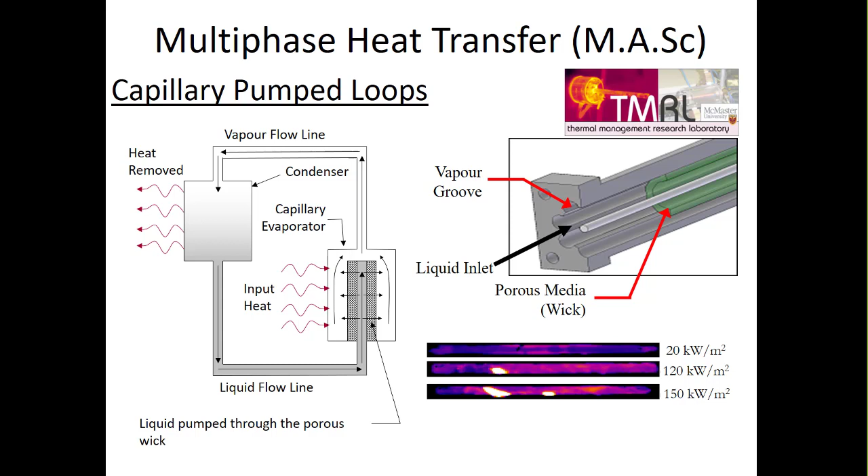So we were looking at different ways to do that using capillary forces. One of the ways you do this here on Earth is that you have your heat source below, and it would boil some water, and that vapor would move up. But the reason the vapor moves up, or really that gravity pulls the liquid down, is because of gravity, which doesn't work in space. So we were trying to think, how could we run a similar kind of heat transfer loop that's multi-phase, that's boiling fluid in space?

So this was a pretty cool project. Then in my PhD, and what I mostly do now, is this idea of digital microfluidics. Here we take small droplets, maybe 100 nanoliters of fluid. These are on chips that are maybe 1 millimeter by 1 millimeter. That fluid is sandwiched between two plates, kind of like the white part of an Oreo cookie. And those plates are separated by about the thickness of your hair, so about 100 micrometers, 1/10 of 1 millimeter.

We're trying to do that to automate biological protocols to make things more accessible. We all do these coronavirus tests where they stick something up our nose, and then they clip that, send it off to some medical diagnostic lab, and in a couple of days you get a result back. But with devices like these, the idea is maybe we could do these kinds of tests on site so we wouldn't have to use traditional medical diagnostics.

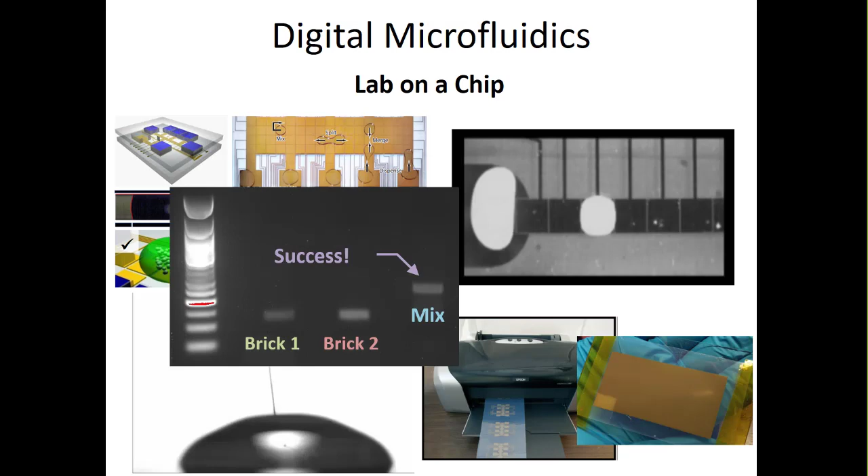We work in different applications, looking at droplets drying and the patterns they make, to try to make flexible electronics or maybe do blood diagnostics. And then we're trying to get into this personalized healthcare where we take a lab, shrink it down, and automate it onto a microchip. So that's kind of the research that I do.

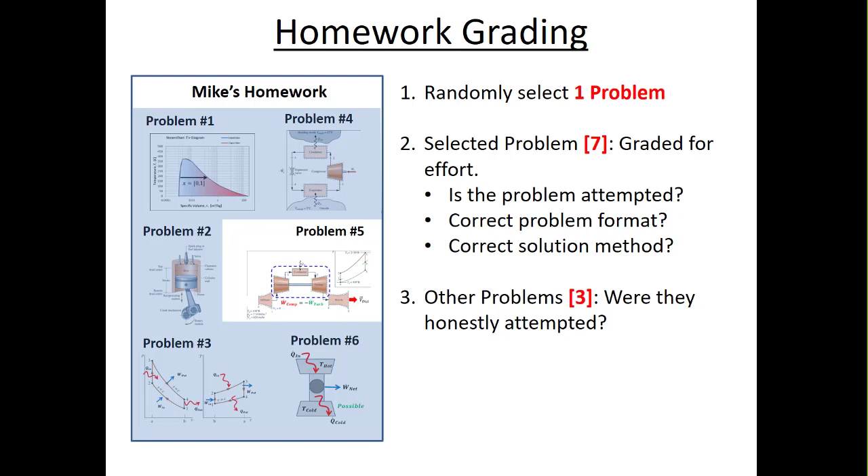We'll grade homework this way: you'll upload your homework to the Dropbox, which should already be live on my courses. I'll look at all the problems, randomly pick one, the same one for everyone in the class, and grade that one more rigorously. But I'm more concerned that you're following the homework process we lay out, and less concerned with you having the correct answer. We'll grade that out of 7: did you attempt the problem, did you follow the right format, did you make reasonable assumptions, did you follow the right method - I'm less interested in the numerical answer. For all the other problems due, I'll just check that you did them, and that's worth 3 out of 10 for a given problem set.

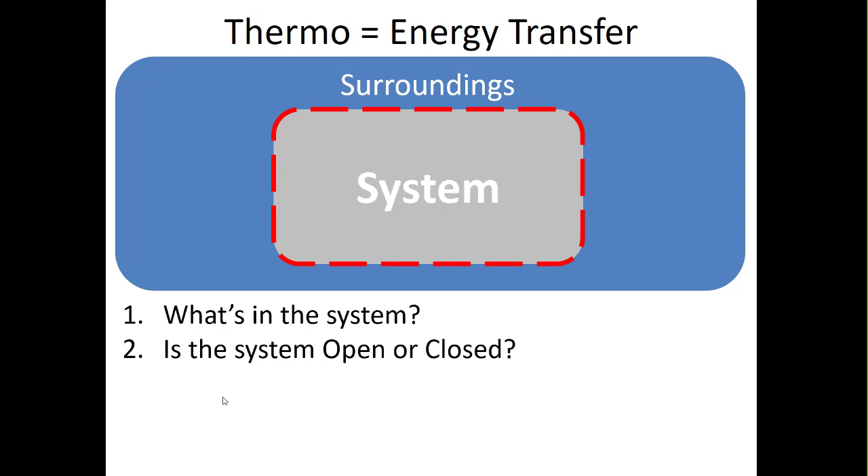Like if you think about your car - I drove here to RIT today - my car engine has an air intake and an air exhaust, so air comes in and out of the system. But a closed system, for part of the cycle of the internal combustion engine, there are two valves, intake and exhaust, that let air in and out of the piston. When they're both closed, there's nothing coming in or getting out of this piston cylinder assembly, so then it's a closed system. A closed system means mass can't be transferred between the surroundings and the system.

What we do is, if we're looking at a problem and how things change over time, we look at some initial time and say, how much energy is in our system? Then we try to figure out how much energy is in our system after some amount of time has passed, so what's the energy change in the system? In this class, the types of energy transfer we're interested in are heat transfer and work.

The reason for this is, as mechanical engineers, oftentimes, like my automobile, the way we get something to move is by burning something. We're turning this heat energy from combusting fuel, in the case of my internal combustion engine, into mechanical energy, that piston moving up and down, connected to different assemblies, and then the wheels start to turn. So in thermodynamics, we're interested in how do we take heat and turn it into work, or more generally, how does the energy inside our system change because heat is coming in and work is leaving?

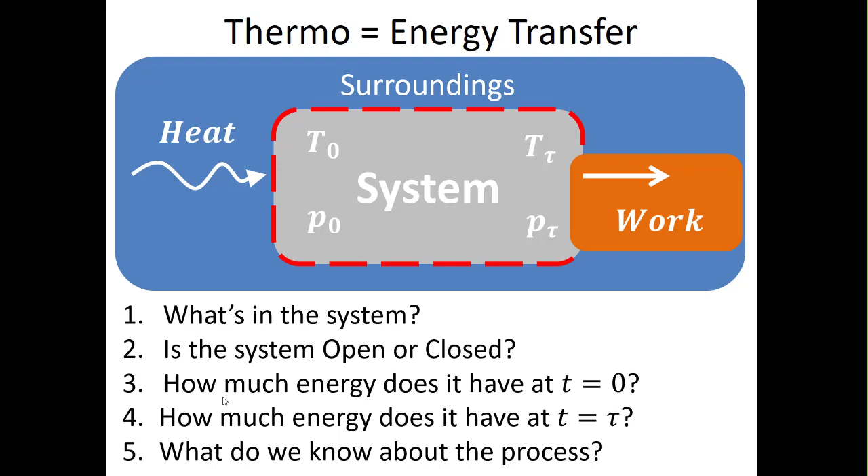So in this class, we're going to talk a little bit more about work, or work and power. Power just means work over time, right? The time derivative of work.

I'm not a huge fan of these big verbal definitions of things. The first law of thermodynamics is that energy is conserved. We can read all of this, but I won't read it to you because you can read it faster than I can read it to you.

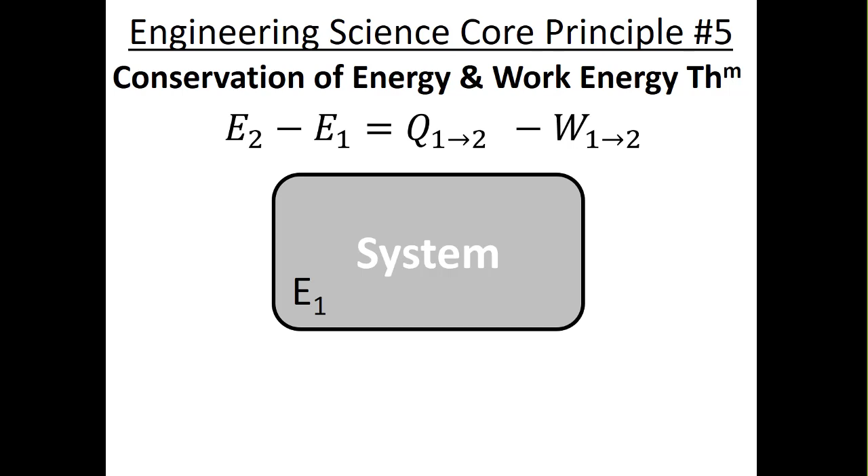So again, this is kind of the schematic. I like to draw these. It's kind of basic, but in my system, I have some energy at time 1, and then I can add heat to it.

Now, this is important because signs are going to be really important in this class, and units are going to be super important too. This is one of the reasons why people hate this class, because there are so many units, particularly if you're not a fan of the metric system yet. You will certainly be a fan of the metric system over the imperial system by the end of this class, because unit conversions are much easier to do when you're dividing by 1,000 versus whatever conversion number you want for the imperial system.

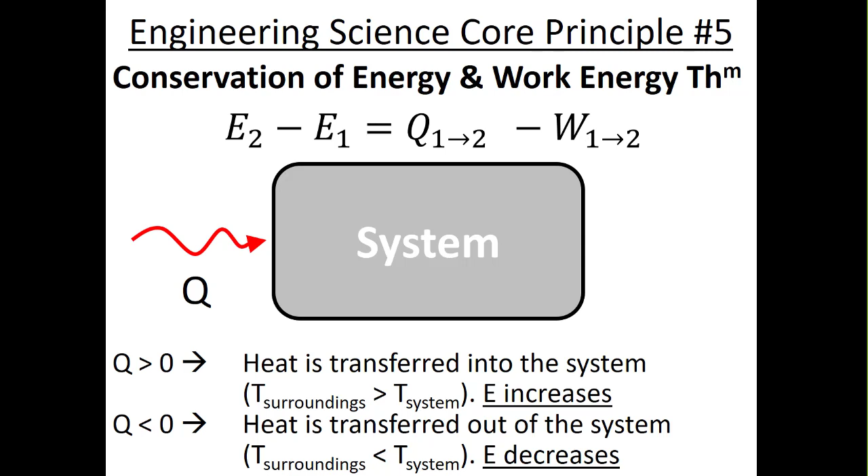So the thing for heat: when heat is positive, heat is going into the system. Heat in is positive. And when heat is negative, that means we're losing heat from the system. This is why, if you buy a coffee or tea at Starbucks, you put that sleeve around it, because that means you're losing less heat. So heat in is positive, heat out is negative.

But work is the opposite, right? If work is done by the system on the surroundings, that's positive. So work out is positive, and work in is negative. In an internal combustion engine, when one piston is being pushed down, another is being pushed up, compressing the gas. That's work being done to the system, so work in is negative.

When we know all that, if we put it into the equation, we'll be able to find how much energy is stored in the system at time 2. If E2 is bigger than E1, that means we had more energy in the system at the end of the process than at the beginning. Conversely, if there's less energy in the system at time 2, that would be a negative number, meaning we've lost energy and depleted the system.

You can remember this by the words, which is my least favorite way, or by the equation, which is always useful, or by the little schematic I've drawn here. This tells us that heat in is positive and work out is also positive. We remember this with the mnemonic HIP to win: heat in is positive, that's HIP; work in is negative, that's win. So HIP to win tells us heat in is positive and work in is negative. It seems a little weird because they're both energies - why is one positive and one negative?

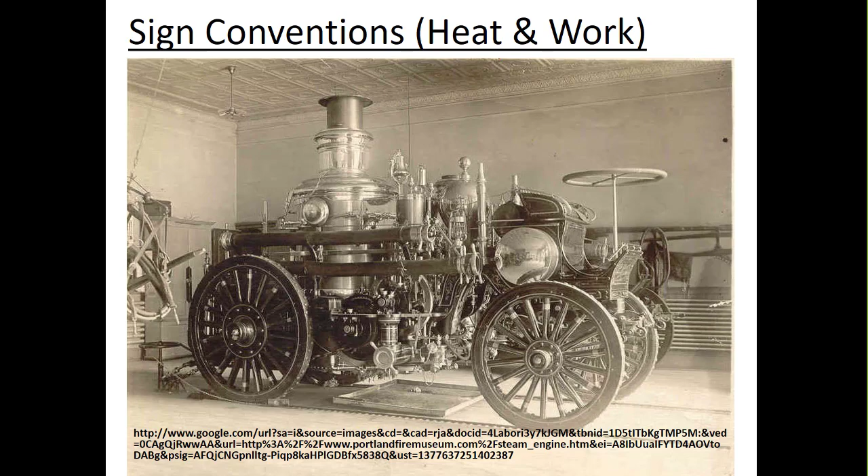It goes back to looking at steam locomotives. What you do in a steam locomotive is add heat energy - you burn coal, that coal boils water. As water boils, those molecules get forced further apart, and that steam wants to expand. It expands over some kind of fan blade, which turns something, and you've gone from heat energy into mechanical energy. So these steam engines were putting heat in and getting work out - both of those things are positive in this equation.

I also just like the picture of that old locomotive.

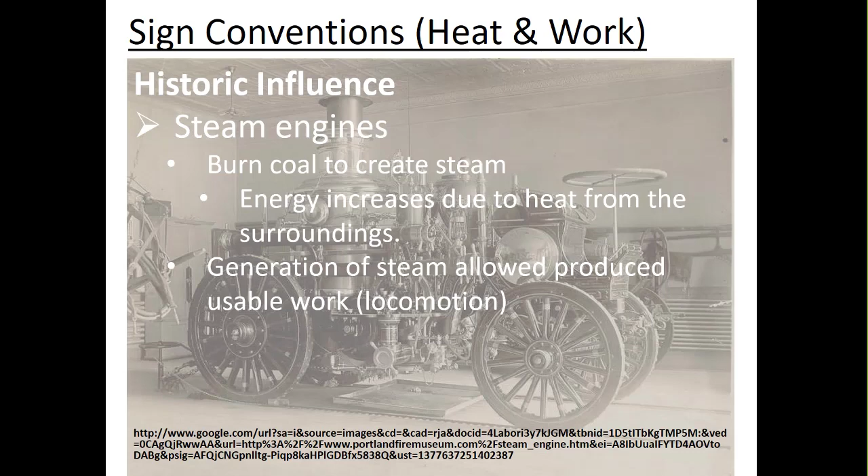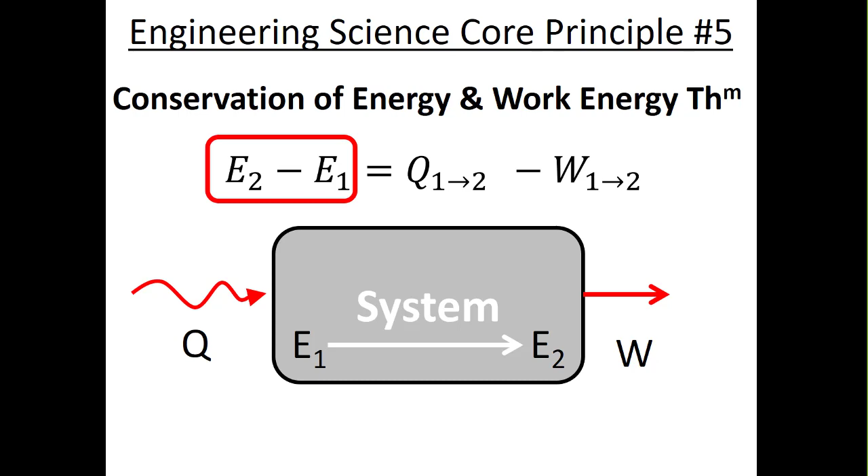When we look at the energy in the system, what kind of energies are we talking about? This equation you're already familiar with, though you probably never dealt with the heat term in a class like first year physics or high school physics - you were just thinking about energy and work. So there are different kinds of energy: gravitational potential energy, like when I push my kids on the swing, pulling them back so they're at some elevation, then letting them go - gravity does the work, transferring energy from gravitational potential into kinetic energy.

We can also think about spring energy, like a bow and arrow. The limbs of the bow are like springs. The archer pulls back the string - the string isn't elastic, it's rigid - and the limbs bend, storing potential energy in the limbs. When you let it go, that energy goes to kinetic energy in the arrow.

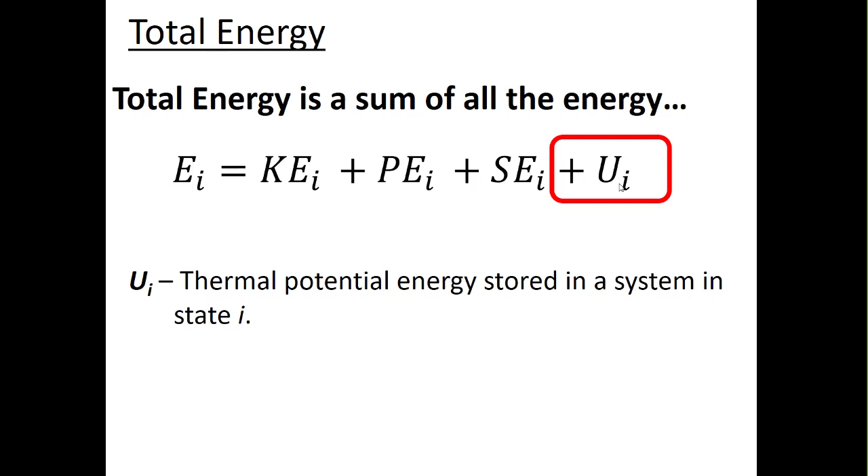So this is total energy, made up of kinetic energy plus potential energy, plus spring energy. But in the problems we're interested in this class, things like how does an internal combustion engine work, or a nuclear power plant, or a natural gas power plant, usually the kind of energy we're going to be interested in is this internal energy, which is related to the temperature and pressure of whatever material or mass we're talking about.

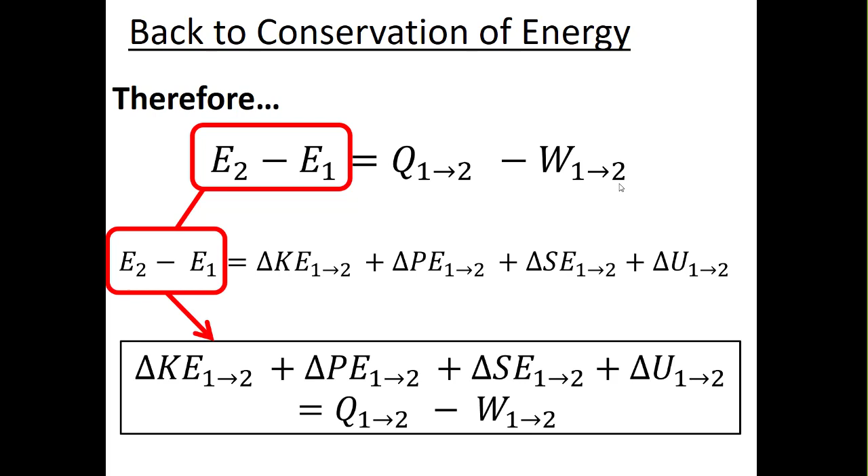So you do kind of already know this. We can write the left-hand side of this equation out. Instead of just delta E, we can say it's delta kinetic energy plus delta potential energy plus delta spring energy plus this delta internal energy. So now our first law looks like this: the change in kinetic energy plus the change in potential energy plus the change in spring energy plus the change in internal energy is equal to the heat that comes in minus the work that goes out. This is the same equation as before, but we're expanding the terms.

Because in these thermal fluid problems, when we look at heat transfer, thermodynamics, fluid mechanics, we have good equations but usually don't know all the inputs. So we break the terms apart like this because in a lot of problems, kinetic energy, potential energy, and spring energy aren't going to be that important. So we'll assume that delta E is often just delta U, and we'll talk about how to fix that later.

You know this already from maybe your mechanics class or high school physics, but they didn't tell you all the assumptions you're making. Anytime you write down an equation, there are assumptions implied by it. In engineering mechanics, you probably said that internal energy doesn't matter, that the change in internal energy on a swing set is about zero, since your temperature didn't change much and there wasn't much heat entering or leaving your body. So what you got was the change in kinetic energy, plus the change in potential energy, plus the change in spring energy equals the mechanical work.

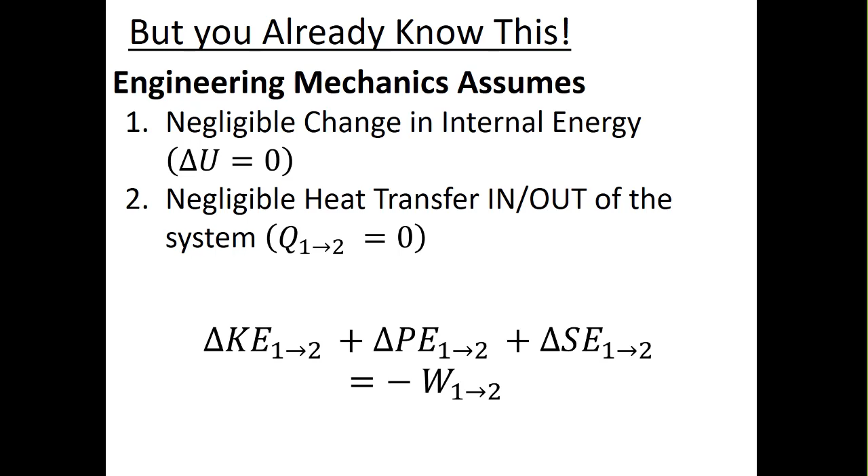That's something you may have seen before, but they didn't necessarily tell you that you were making these assumptions. Just like when you go out on co-op, it's going to be really important that you leave good documentation behind, because these co-op positions are transient. You're only there for a short amount of time, so you want to leave good notes so whoever comes after you can pick up where you left off. Your first introduction to this will probably be when you come in as a co-op and get the last co-op's notes and realize half the stuff you want to know isn't there. This is kind of like commenting in programming, which is something maybe I should be better at. But you want to have good notation, and that's what tracking your assumptions does.

In thermodynamics, unlike solid mechanics, we're really interested in internal energy and heat transfer. It's thermodynamics, so we're interested in temperatures and heat transfer, because that's one of the two main kinds of energy transfer we're looking at. So we can't just cross out Q and we can't just cross out delta U. We're going to, for now, leave this whole equation. This only works for closed systems. As we get into open systems, when mass can move freely in and out, we'll have some more terms to deal with.

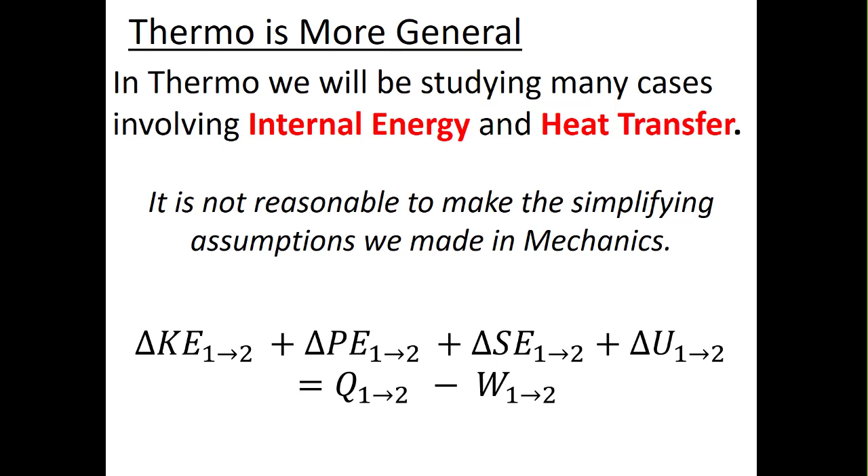We won't beforehand make any simplifying assumptions. When you get into a particular problem, maybe you'll say there's no kinetic energy change, or there's no potential energy change, so you might cross out some terms for each individual problem. But at the base level, we're going to leave the equation like this.

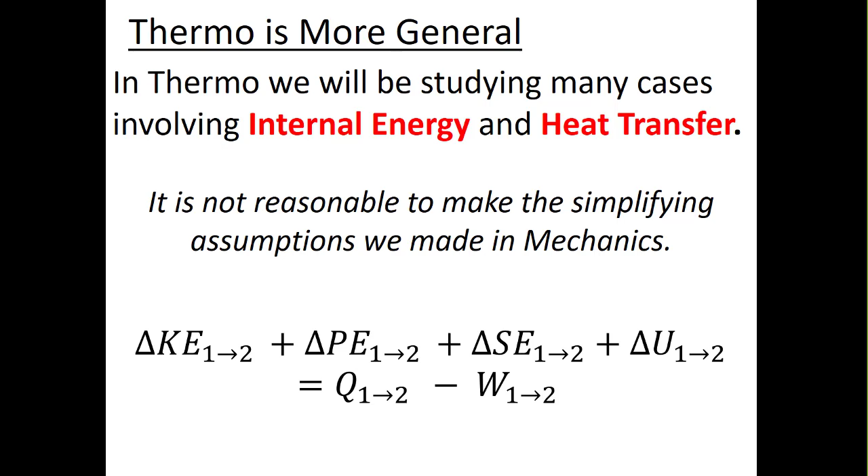So that's kind of where we get into work. But then we talked a little bit about power being important too. Power is work divided by time. So when you look up a particular automobile engine, you might be interested in what's the horsepower of that engine. Horsepower is one of those imperial units that doesn't make a lot of sense, but it's talking about how much work it puts out per unit time.

Typically in this class, when we see a dot above a letter, this is shorthand for taking the derivative with respect to time. So dw by dt is the same thing as w dot, the rate of change with respect to time. That's not an uncommon bit of notation in mechanical engineering.

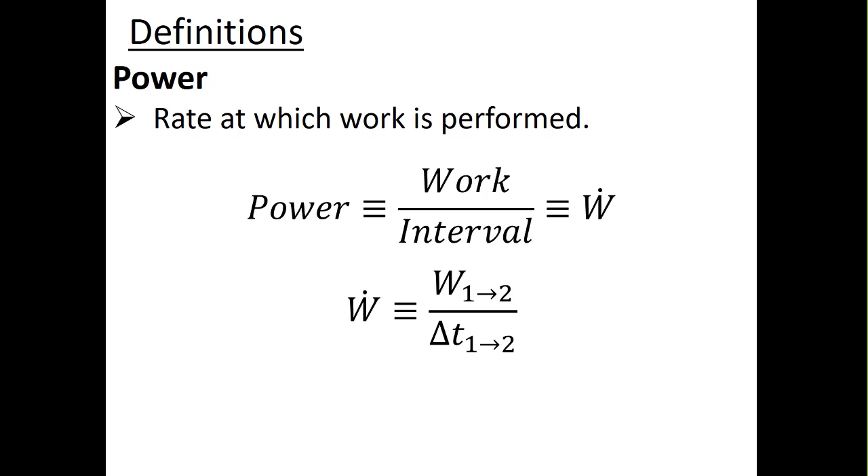We know that power is work divided by time. If the work was constant to get this rate, we could just take work and divide it by delta t. So if the rate of work was constant, we could do this. But the rate of work isn't always constant. Still, as a first approximation, we could do this.

So we can look at the units now. If a process produces 1 joule of work in 2 seconds, what's the average power output? I've got to track my units in my calculation here. W dot equals 1 joule divided by 2 seconds, which is half a joule per second. But a joule per second is the same thing as a watt, so watts are joules per second.

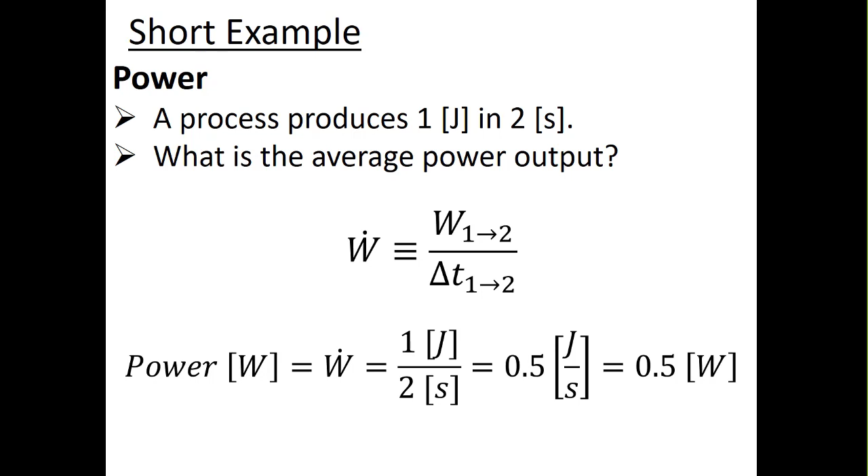Now we want to talk about what happens here. Certainly not advocating that you do this, but maybe you got a potato gun. It's a PVC pipe with a potato as a plunger. You have air in there that's at some high pressure.

In this case, what's happening is we pull this pin, maybe like a firing pin, and then this air, under pressure, wants to push out. Because force is pressure times area, and if the rest of this is rigid, it's going to be pushing force on this piston face, or potato in the potato gun case, and that's going to cause this piston to move this way.

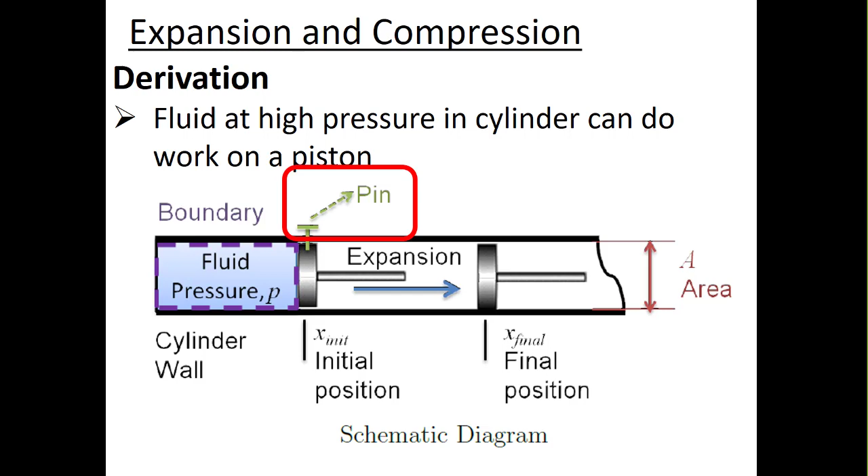That air is going to be doing work on that piston face, right? And it's going to move. So when we pull this pin, the piston's going to move. The air pressure is going to push the piston out.

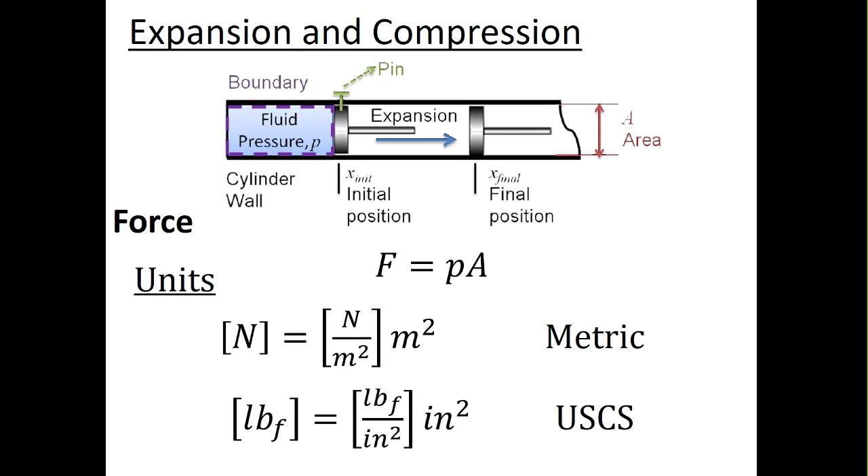So now if I want to find the work or the power, if this pressure is constant, I can find the force on the piston by taking the pressure times the area. If I was using metric units, pressure would be in pascals, which is newtons per meter squared, force per unit area, multiplied by an area, and I would get newtons.

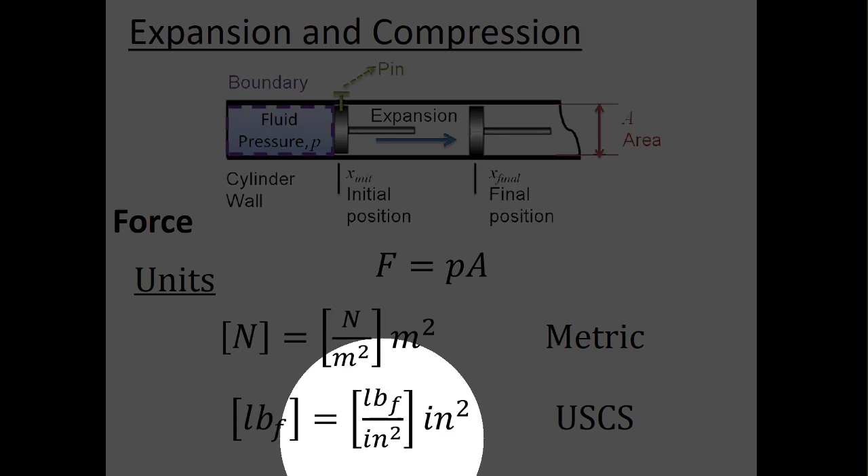If I was using the imperial system, sometimes called the US customary system, I would be taking pressure maybe in a unit like pounds per square inch, or PSI, that's pounds force per square inch, multiplied by inches squared, and I get pounds force. So that's good, I'm getting force.

Because in this case this pressure is going to be changing as the piston is moving, I need the force as a function of x. So to find the work, I would have to integrate the force over the length. But just for unit's sake...

Let's say you don't trust me with this equation. Let's at least check the units. This is kind of like one of the things we'll learn in this class: checking the units is a bit like cheating, because you can always check the units. It's never going to tell you if you're right, but it could tell you if you're wrong.

So if work, which is a kind of energy, gave me Newton meters squared, I'd know that's wrong, because joules, which is energy, is newtons times meters. Or maybe in imperial it's some force times distance, so maybe it's inch pounds. My force is going to be in newtons or pounds force, my distance term could be in meters or inches, and I'm going to get a force times the distance. So that looks good so far for work.

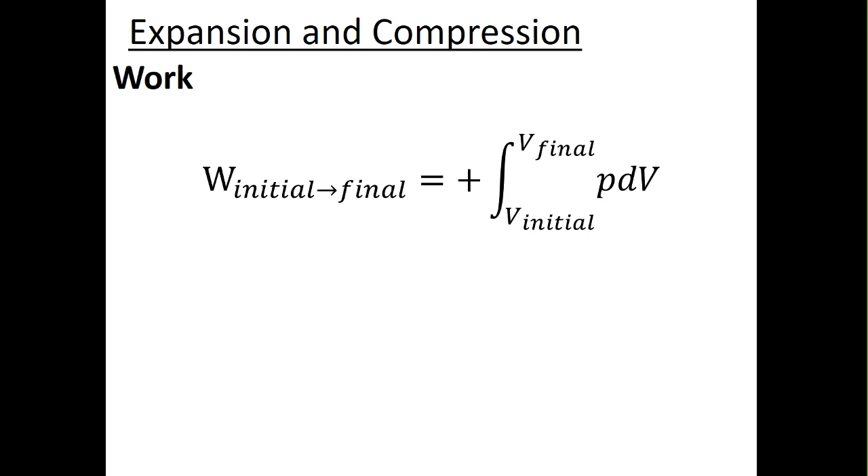If you want to look at the full lecture posted online, I go through a derivation of this equation, but I wanted to hit the time here, so I got rid of the derivation. But another way to write this down, this force times dx, is to take the integral of pressure times dV, where V is volume. So we're integrating the pressure over the change in volume.

Now, again, I haven't shown you the derivation, although you can see it in the online video if you want. You might not believe me, so let's at least check the units, because if the units are wrong, then you know for sure that I'm wrong. Here we want joules again.

So if my pressure was in newtons per meter squared and my volume was in meters cubed, then what I would get is Newton meters, which again is joules. So this equation is correct, and we'll be using it a lot, but one of the ways you can check that it's correct is by looking through the units.

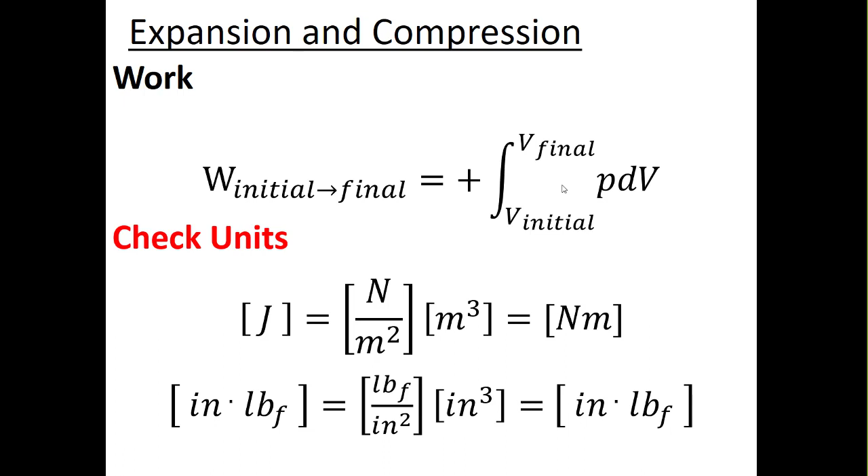If we were talking about imperial units, our pressure is going to be something like PSI. Volume could be in inches cubed, to save myself the headache of cubic feet. Then the inches squared cancels out two of these, and I'm left with inch pounds, which is a unit of energy because it's force times distance, or distance times force, same thing.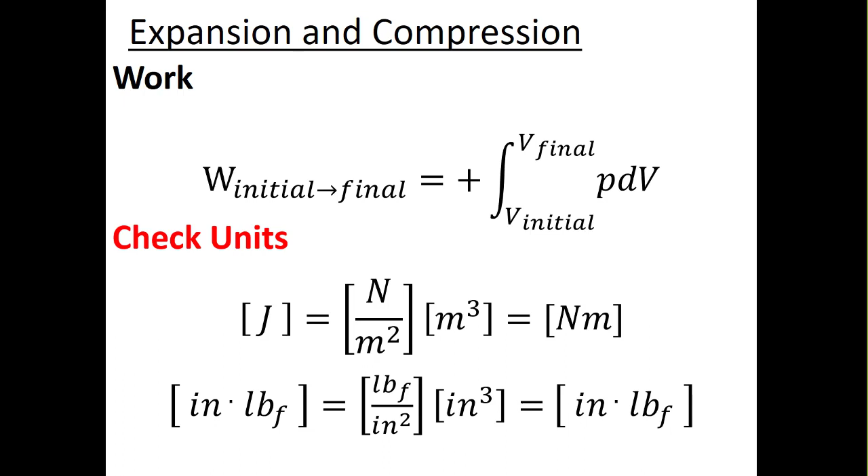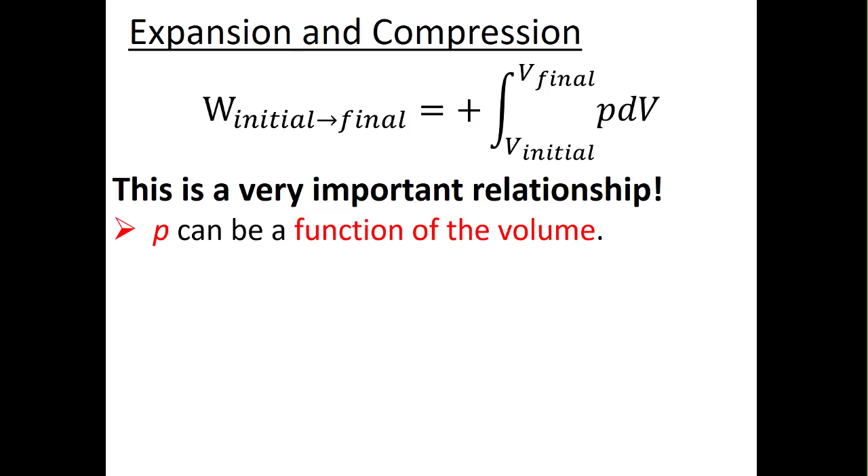So this is a very important relationship, and we'll be using it a lot in this class, because as we talk about piston cylinder assemblies and how much work is being done, we'll want to know what the pressure-volume relationship is. So we'll often be talking about what we call polytropic processes. A polytropic process is one where we know the relationship between pressure times volume to some exponent is equal to a constant. In next class, we'll learn how to deal with that to solve for work.

Pressure can be a function of volume, and if we know that, we can analyze arbitrary cross-sectional areas. If we know what pressure is as a function of volume, I can write down pressure as a function of volume and plug it into this equation to get a value for work, which is good, because our big equation for the first law is delta E equals Q minus W.

So this class is really about how do we find W. The most important way we're going to find W for the first third of this class is by taking the integral of P dV. So if we have these polytropic processes where P times V to the N is a constant, then P will be C divided by V to the power of N. I could plug that back in and do a little calculus to find the amount of work in the system.

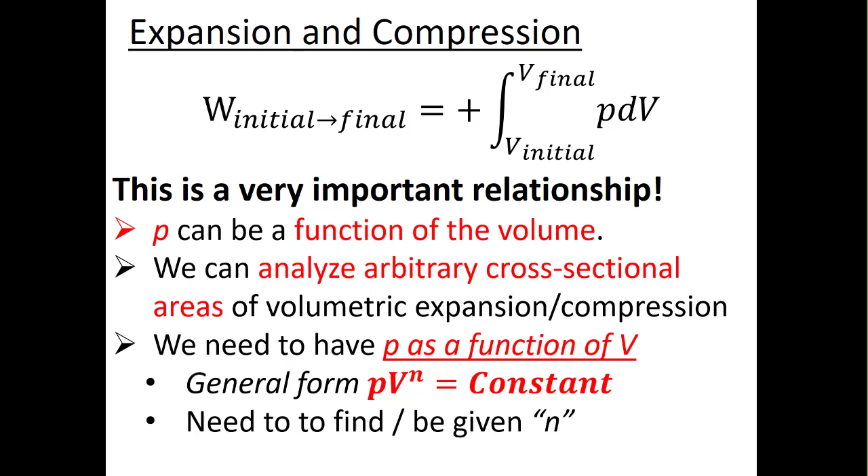So oftentimes in a problem, it'll tell us PV to the N is constant, but they'll tell us N will be something like 1, or 1.3, or 2. So we'll get that relationship as given information in a problem.

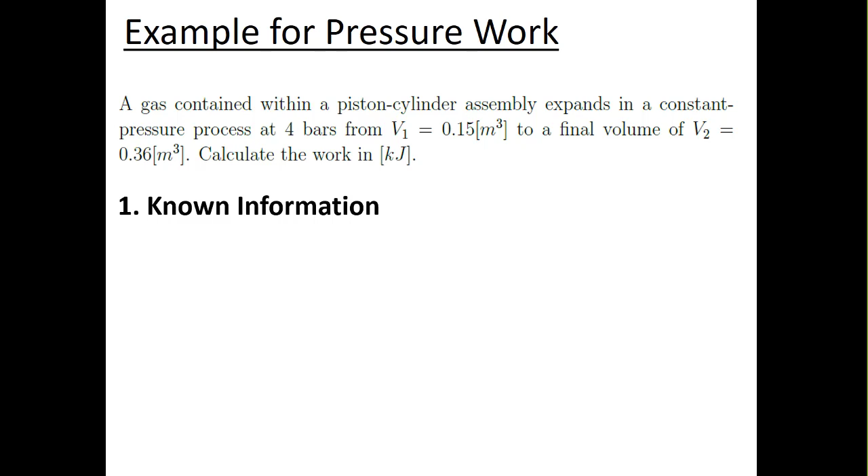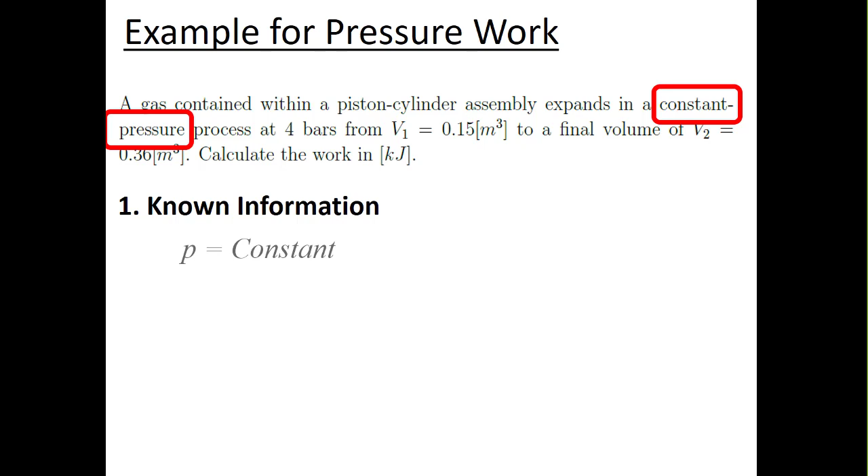So if we go through our stock process for how to do problems, we take our known information. We look through the problem: the first thing here is that it's a constant pressure process, so the pressure stays the same all the time, which is good. Anytime something says constant, there's a little voice in my head cheering, because it means I don't have to do a lot of calculus—the calculus will be pretty straightforward since the pressure is constant. So I know the pressure is constant, and even more, I know the value: the pressure is 4 bars.

My advice to you, every time you're writing down known information, is to write the pressure down in kilopascals if it's a metric problem, because the units will work out well: if you integrate P dV with pressure in kilopascals and volume in meters cubed, you'll get kilojoules. So this is in bar, but we'll have to convert that later. We know we go from a volume of 0.15 meters cubed to a final volume of 0.36 meters cubed, and they ask us to find the work—work equals force times distance, or pressure times change in volume. They want that in kilojoules, so not only do they want the work, they tell us what units they want it in.

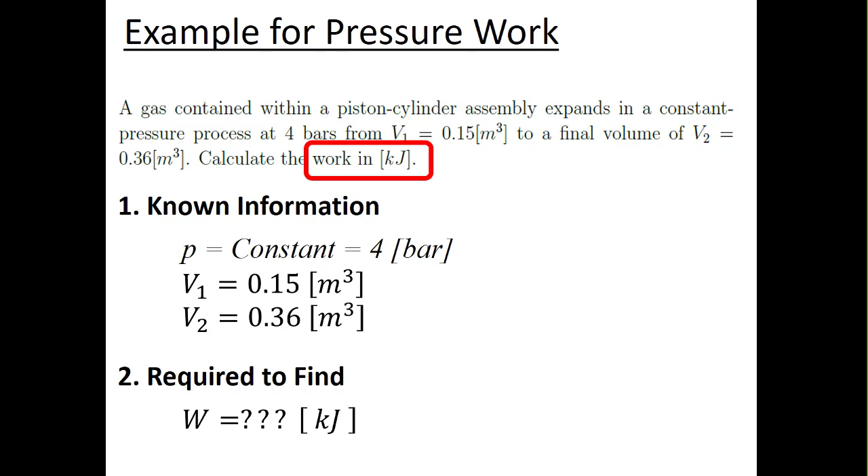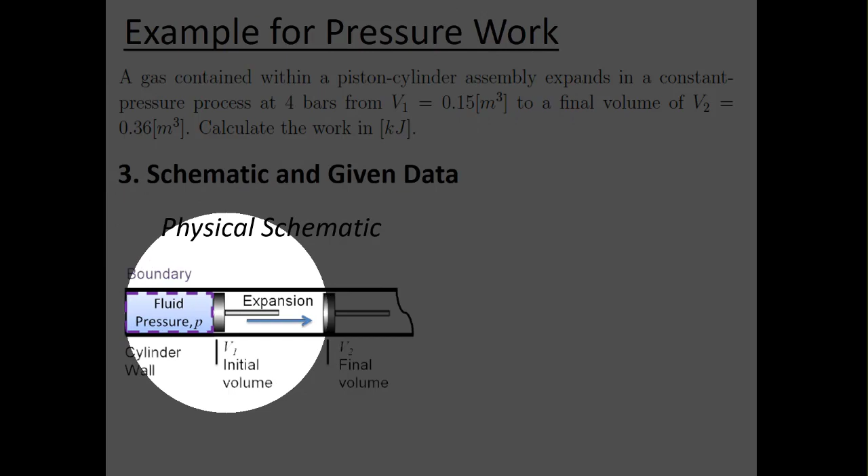One of the things we always want to do is draw a schematic. Our schematic might look like this: it's this piston cylinder assembly with some fluid at some constant pressure. Because we're moving from a smaller volume to a larger volume, our system is expanding. Anytime a system is expanding, it means the fluid is doing work on the surroundings, so this is work out. We're expecting this work value to be positive because the gas is pushing out on the universe.

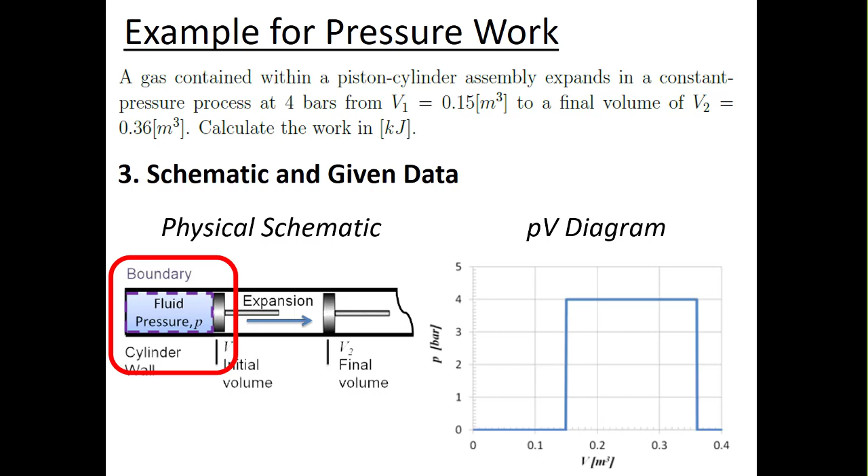Now we know that the pressure here is constant, so one of the things we like to do is draw PV diagrams, or pressure versus volume diagrams. The cool thing about this is because the work we're trying to find is the integral of PdV, if you remember from calculus class, that means it's the area under this curve.

In this case, it's nice because the pressure is constant, so you could just do this geometrically, but we'll go through the equation. You could take the area under this curve, and because it's a rectangle, we could get to a pretty good answer just from drawing this diagram. That's one of the reasons drawing diagrams is always a good idea.

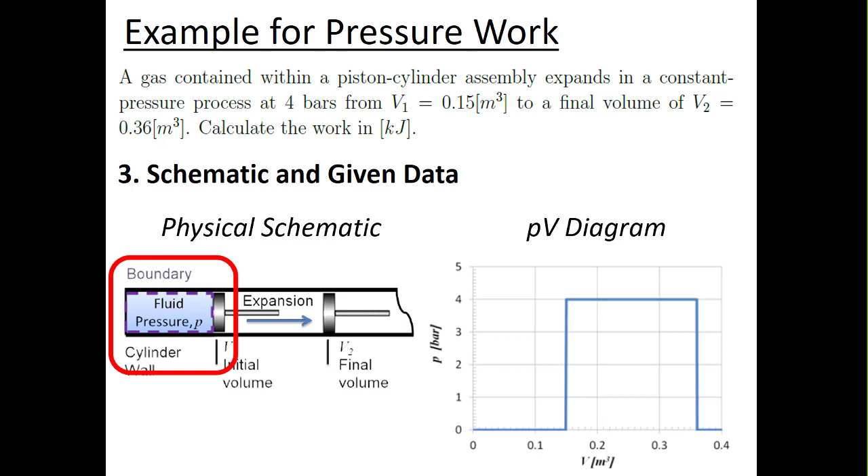So we're going to write down our assumptions. We assume that the pressure is constant. We're going to neglect any kind of friction in the system. We're also going to assume that the mass is constant. They didn't tell us that, but we're going to assume that none of the mass in the system is leaking out to the surroundings.

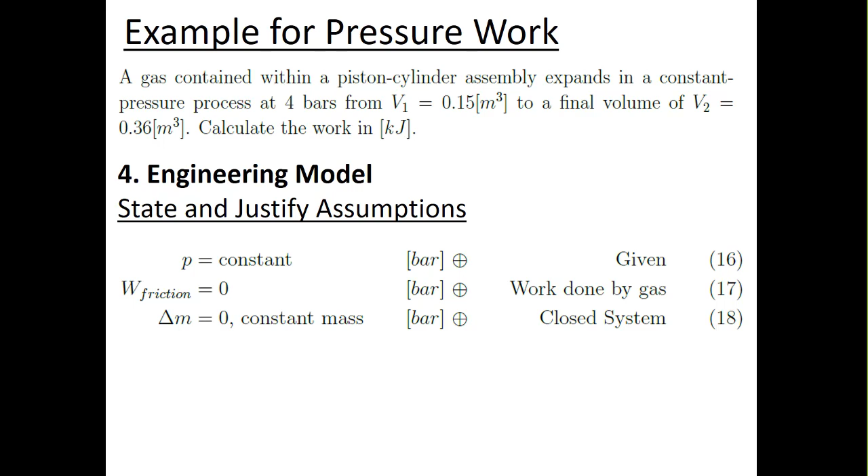So now we want to find the work. So we need an engineering model - what's your equation, or what are your different equations? Here we just want work, so there's one equation, and that's work is the integral of PdV.

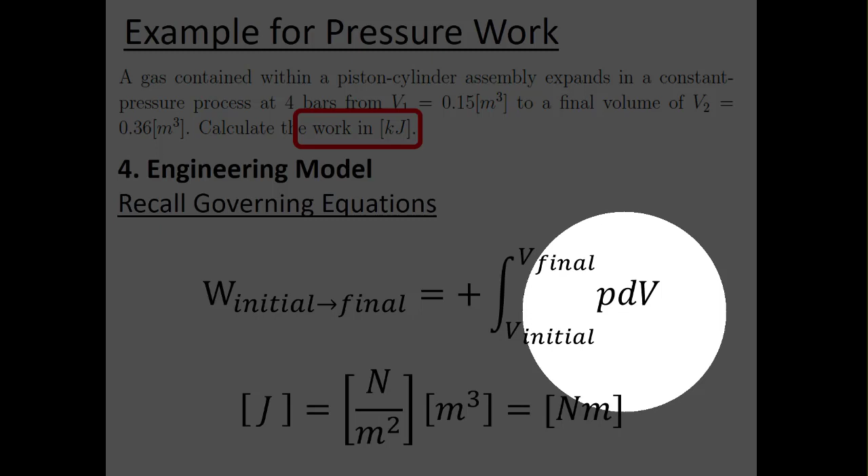I apologize, I'm a little bit over, but I think we'll be done in a couple minutes here. So we know that the units here make sense - when I write down an equation, I always want to think about the units. I want work in kilojoules. So if my pressure was in newtons per meter squared and I multiplied by meters cubed, I get Newton meters, which is joules, which is at least in the same family as kilojoules - 1 kilojoule is 1,000 joules. So I have reasonable confidence in this equation because the units look like it would be correct.

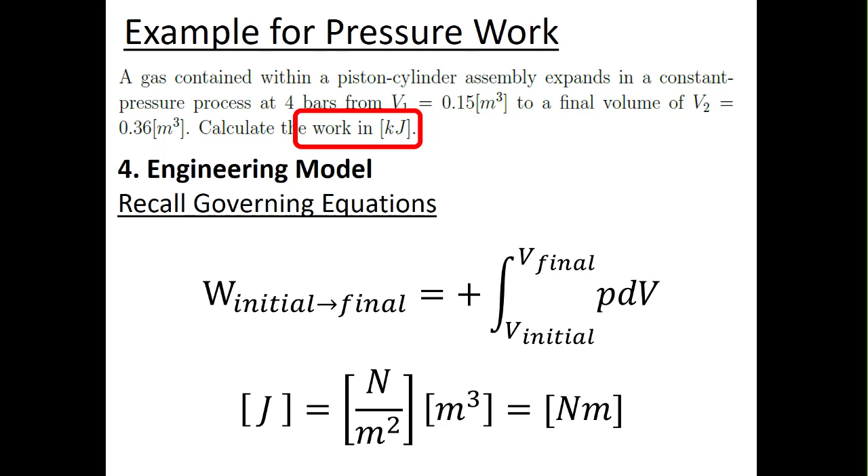So now I'm actually going to start doing the work. I'm always going to encourage you to do as much of the work symbolically as you can before you put numbers in, because that will help me understand what you're doing when I'm grading you. But more importantly, in the real world, you do a project and come back to it 6 months later, you're not just going to remember what happened. So the more you do this symbolically, the better it is. It also means as you're designing something and change a given parameter, you already have the governing equation, you just put different numbers in. So carry the symbols throughout the process as long as you can.

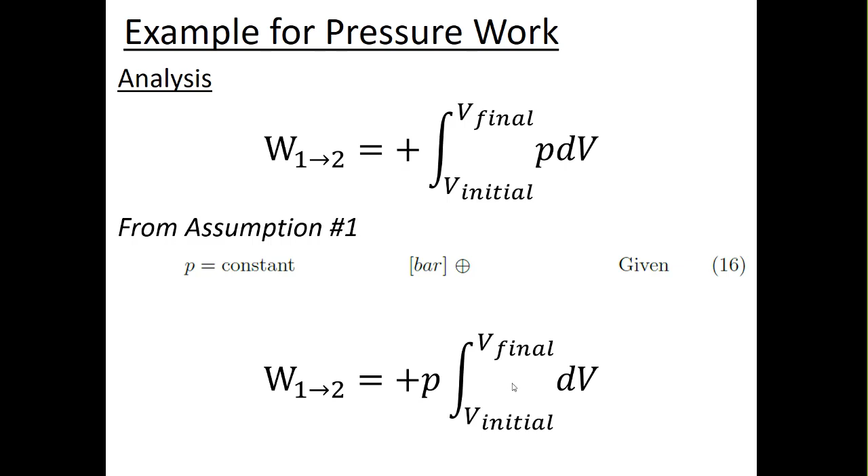Because we know that the pressure is constant, we can bring that out of the integral. Now this is good - my favorite calculus is always when the answer is 0, but this is my second favorite, when something is constant, because now I just have the integral of dV from V1 to V2, which is just going to be delta V. So my pressure is constant, and I got to remember that it's V final minus V initial. In this case, the system is expanding, so the final volume is larger than the initial volume.

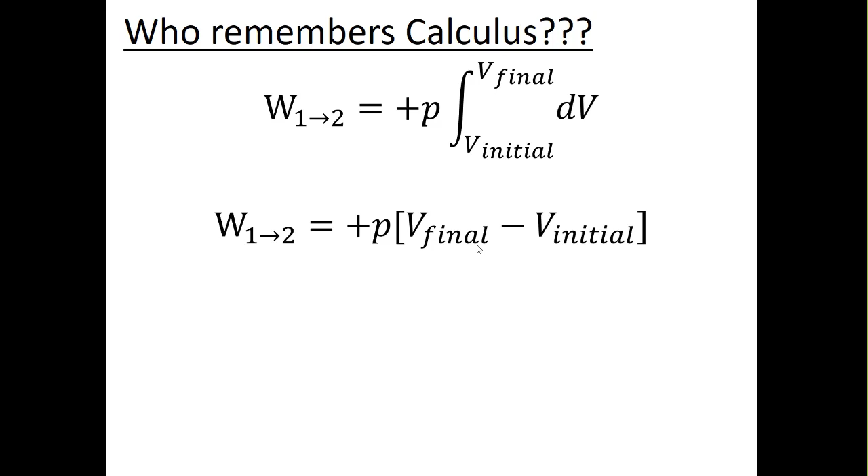And now I put units in, or I start to put my numbers in. So this is like my symbolic solution, but I want an actual number. So now I'm going to put numbers in, but when I put numbers in, I got to put units in as well, and we'll see why here.

Because here I have my delta V term, these are both in cubic meters, but my pressure is in bar. So if I just put these numbers into my calculator, it would look like 0.84 bar meters cubed, which doesn't really make any sense because what we actually want is work in kilojoules. It's not like that other answer is wrong, it's just in a unit that nobody would ever talk about. You can't go to Home Depot and get a pump that outputs some kind of work in bar meters cubed. So instead, we want kilojoules here.

So to get to kilojoules, we have to convert the pressure term. My advice is always to convert pressure to kilopascals right at the beginning of a problem. A bar is 100 kilopascals, right around atmospheric pressure, which is about 101.3 kilopascals. But the metric system likes nice round numbers.

So we made up another unit called bar. A bar is 100 kilopascals, or 10 to the 5 pascals. So we can put that in here, in my units. This is 4 bar, but each bar is 10 to the 5 newtons per meter squared.

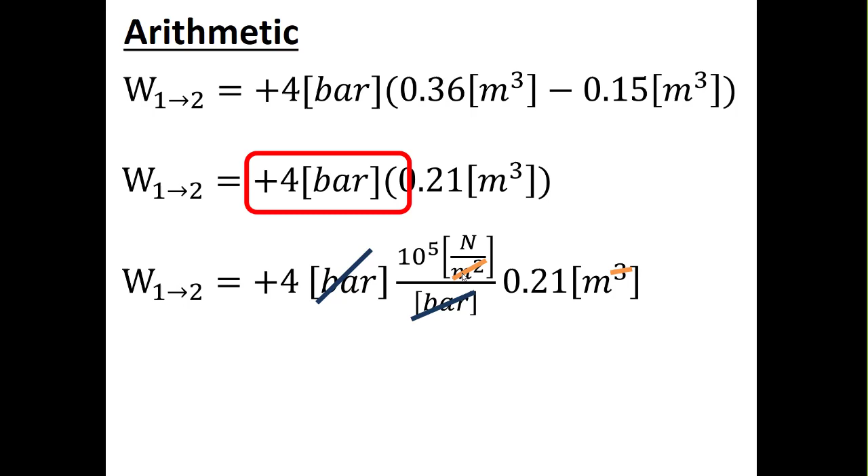Here I'm adding an extra step, and you'll see why I like to do kilopascals too. I cancel out my bars, and meters cubed divided by meter squared just leaves me with meters, which is nice because I got newtons on top. So now I take 10 to the 5, multiply by 0.21, and I get 84,000 Newton meters. I know that Newton meters are joules.

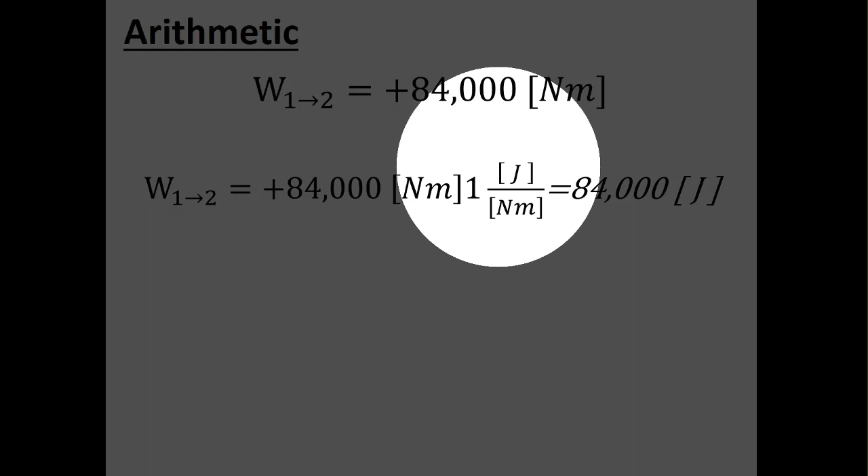Maybe I'm going a little overboard with the unit conversions here. Some of these you can just do in your head, but I want to show you how I do this mathematically. I take 84,000 Newton meters, but I know that 1 joule equals 1 Newton meter, so my Newton meters cancel out, and I get 84,000 joules. But I know that 1 kilojoule is 1,000 joules, so I can cancel out the joules and get 84 kilojoules.

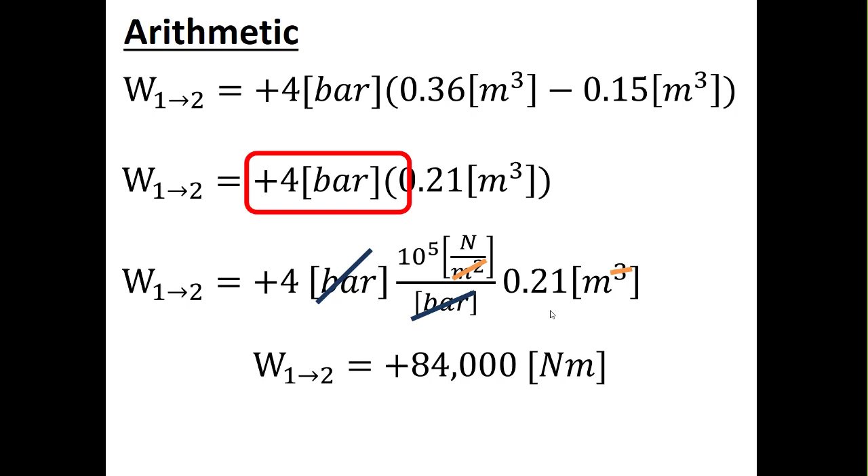My life would have been a little easier if I had gone back and automatically converted this to 100 kilopascals instead of 100,000 pascals. Then I would have had kilonewtons times meters, which is kilonewton meters, which is kilojoules. So if you put your pressure in kilopascals, your life will end up being a little bit easier.

So then the last part of our process, and maybe you're not as familiar with this, is we want to test: does our answer make sense? A bit of a sense check here. Even if we don't have intuition about the order of magnitude, we can always check the units.

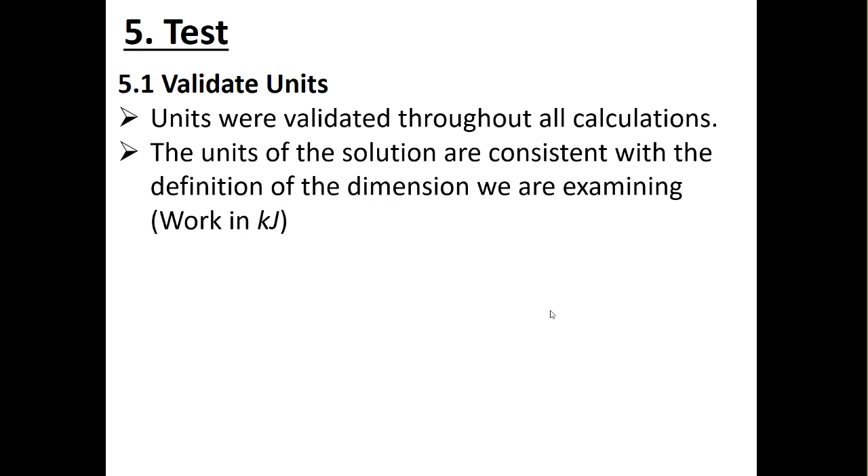We were asked for work in terms of kilojoules, and we got an answer in kilojoules. It doesn't mean we're right, but we can't prove that we're wrong. If we still had an answer in bar meters cubed, we'd know we didn't really answer the question. So just because your units are right doesn't mean you're right, but if your units are wrong, it means you're wrong. Having the right units increases your confidence, but doesn't necessarily make you right. So we got the right units.

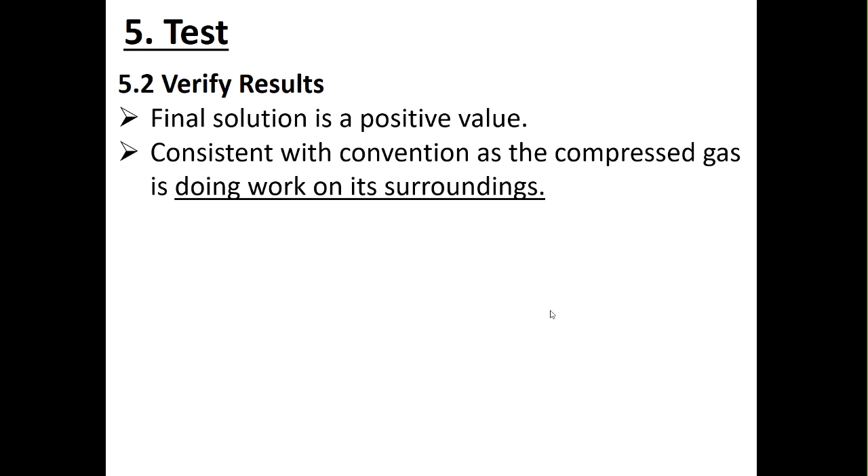The other thing we can do is check the sign. We know the system is expanding, the gas is pushing out on the piston, which means the system, the gas, is doing work, pushing that piston out. We know from HIP WIN that work in is negative, but this would be work out of the system, so this should be a positive number. And we did get a positive number, which again doesn't mean we're right, but it means we can't prove we're wrong, and that's a pretty good thing. We tested these things and they worked out. So I don't know if my answer is right, but I can't prove it's wrong, and that's something.

So that is the end of the class today. Next class, we'll do a problem where the pressure varies with volume, so you can see how to do something like that, which will be more in tune with what the homework problems are.